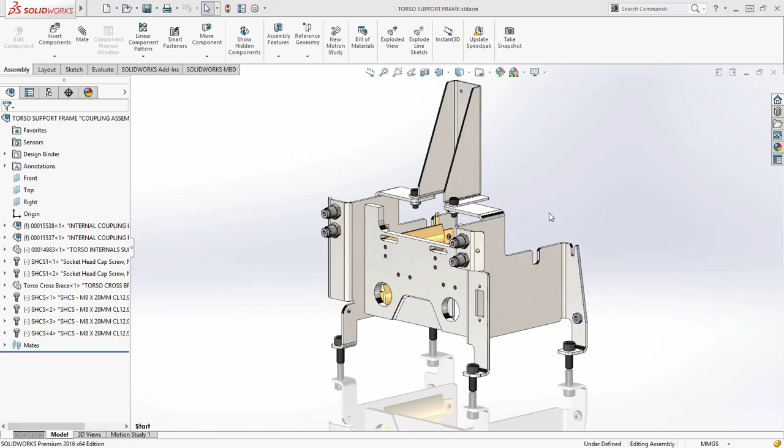SOLIDWORKS 2016 introduces some exciting new capabilities for costing. First, let's take a look at some new sheet metal capabilities. Now this part has already been costed, but we'll show you some new capabilities that have been added, namely the ability to cost a part based on sheet size.

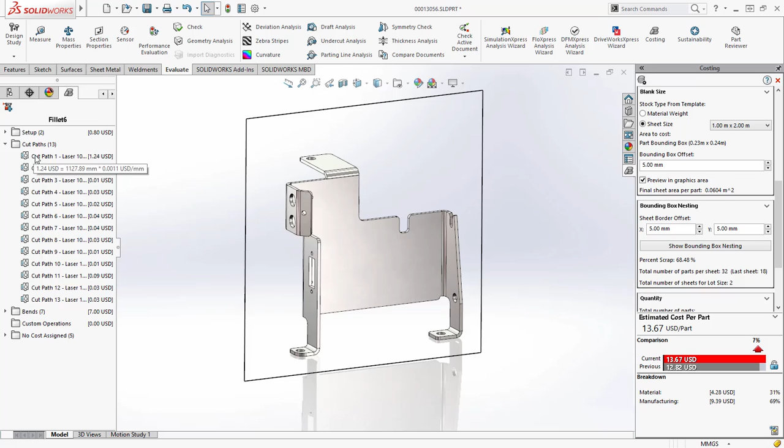Previously we had the ability to cost a part based on material weight. For 2016 you now have the option to choose the sheet size. For this material there are multiple sheet sizes. Notice as the sheet size is changed, the cost per part changes. The bounding box offset is not new, but does give a visual representation of the added material that may be required at the border of the flat pattern outline.

With the new sheet size costing, there is a sheet border offset to add additional material near the edge of the sheet. SOLIDWORKS 2016 introduces basic nesting capability that nests the bounding boxes, giving a quick cost estimate. To be sure, this is not full nesting, which uses algorithms to determine the best way to lay out the parts to minimize raw material use, but does address the request from SOLIDWORKS customers who have indicated that basic bounding box nesting is good enough for the estimation stage.

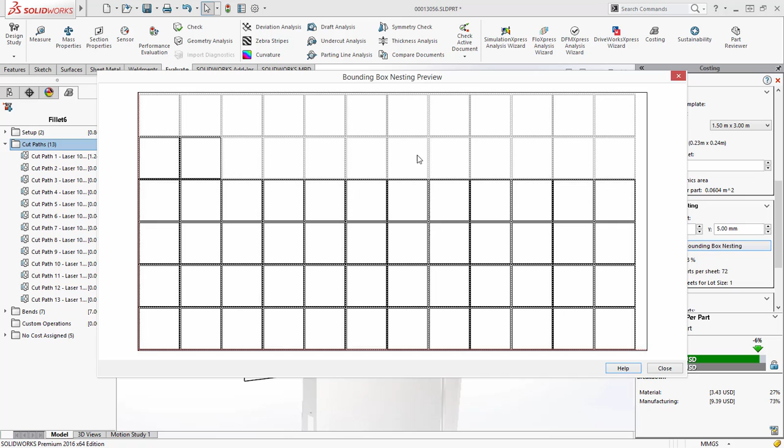SOLIDWORKS provides the percent scrap, number of parts per sheet, and total number of sheets required, in this case 2. Changing to the larger sheet size, you can see that this lot can now be nested in a single sheet. You can get a visual representation of the nesting and see how the bounding boxes line up, and you can see the areas where material is left over, where you can reuse for additional parts.

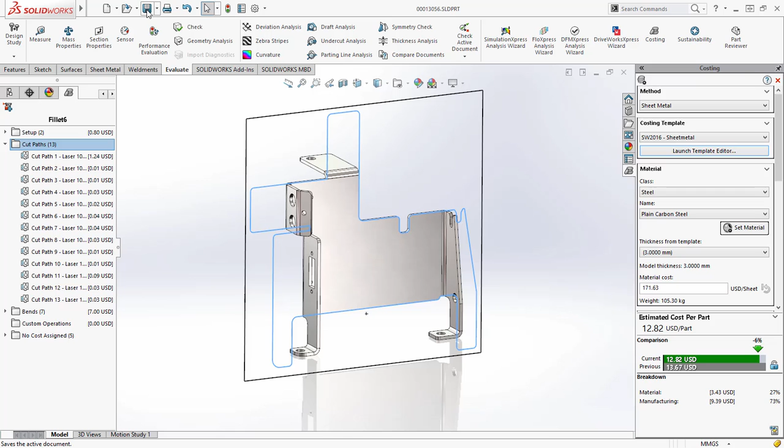The setup is done through the costing templates. Looking at the thickness and filtering for materials, you can see that for the 3mm sheet we have information for costing by weight, as well as 2 entries for the multiple sheet sizes and their associated costs. Let's save this cost information with the part and go back to the assembly and take a look at some enhancements for costing machined parts.

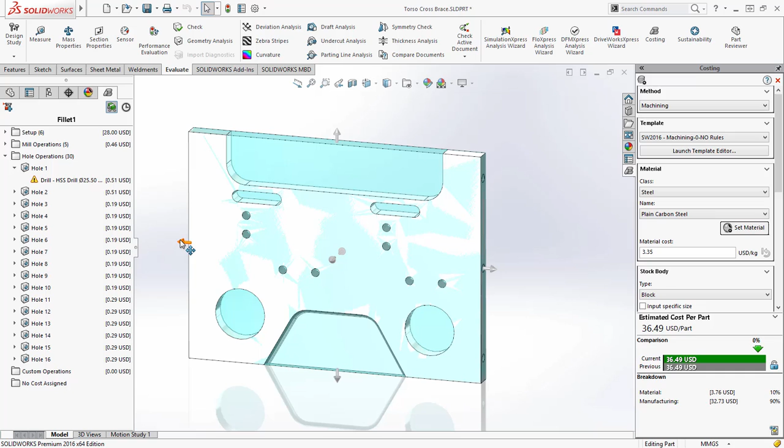In this part we have some large 26mm holes. SOLIDWORKS Costing recognizes these as holes, but since we don't have a drill of that size, warns me of the mismatch with any available tool. To rectify this, you can choose to change this feature to be a milled hole, but it's up to you to remember to do this. On milled parts like this, you may choose to always add some machining allowance around the perimeter of the part. Again, you have to remember to account for this step in the costing process.

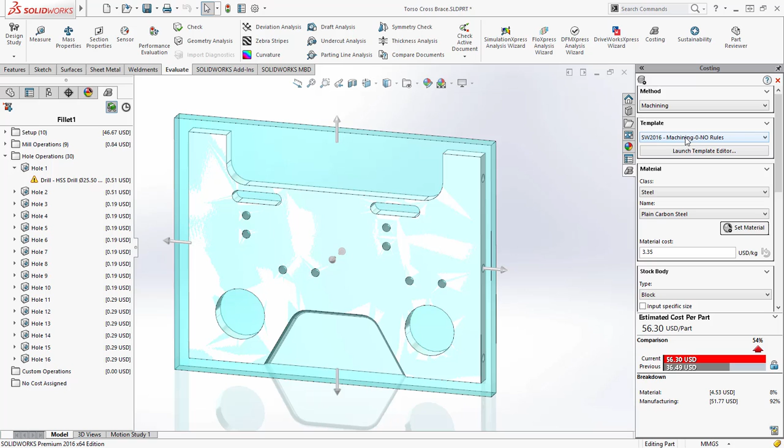Another common action may be to add a custom operation, like anodizing or plating for all steel parts. These tasks are something that the user has to remember to do for each part, but are better done through automation, and SOLIDWORKS 2016 adds just this capability with rules-based costing. Changing to a costing template that contains rules gives you a different cost per part.

Notice that the machining allowance has automatically been added to the perimeter of the part, and there are facing operations to remove that material. The large holes have now been identified as milling operations as opposed to drill, and the zinc plating has automatically been added as a custom operation. All this with no interaction by the user. These rules are captured in the costing templates.

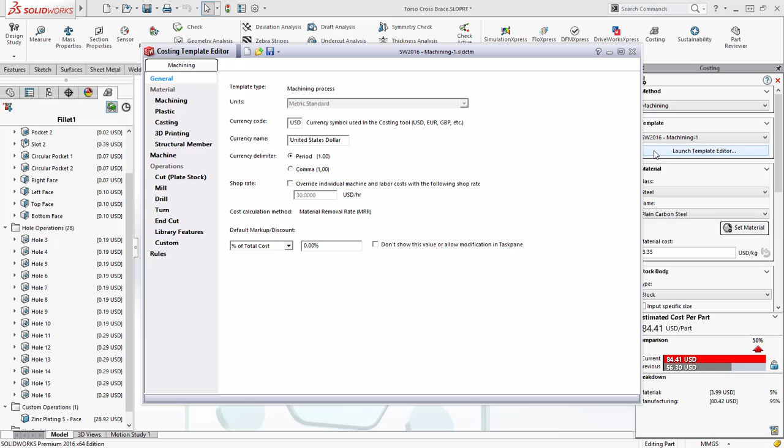The first rule in this template says to convert all holes that are larger than 20mm to milled circular pockets. The second rule says that if the part is steel, then to add zinc plating to the part. And the third rule adds material to the sides of the block if machining is selected. Adding a new rule is simple. Give it a name, then choose the type of rule that you want to apply, if or if then, choose from the available list of rules.

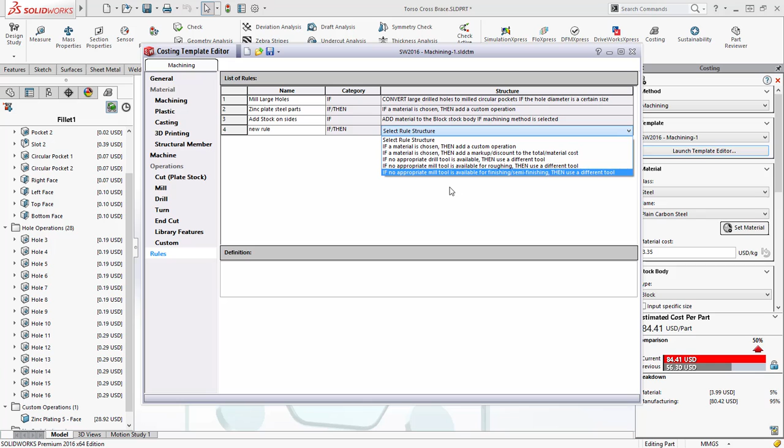This new rules-based costing is a simple way to build intelligence into your templates to keep you from having to remember to do it manually and provide you more accurate cost information. Again, we'll save this part and jump back to the assembly. SOLIDWORKS 2016 introduces the ability to do costing on the entire assembly. You can see that there are 2 parts that have yet to be costed.

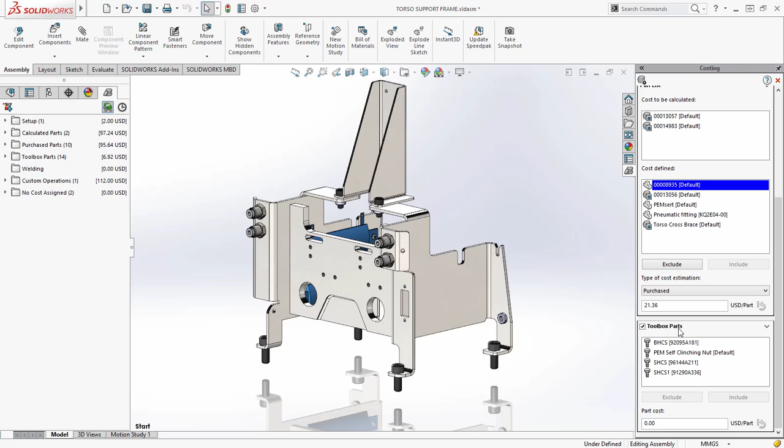Parts that contain cost information are listed as well. The 2 parts that we just worked on are listed with their saved cost, as well as purchase parts with their associated costs. Toolbox parts are included along with their associated costs to give a complete cost breakdown for the assembly. Let's begin the cost estimation for this assembly, and SOLIDWORKS will cost the 2 parts that had no cost information associated with them, as well as do a complete roll-up of the cost for the entire assembly based on the quantities of each part. You can see the newly costed parts along with the ones done earlier.

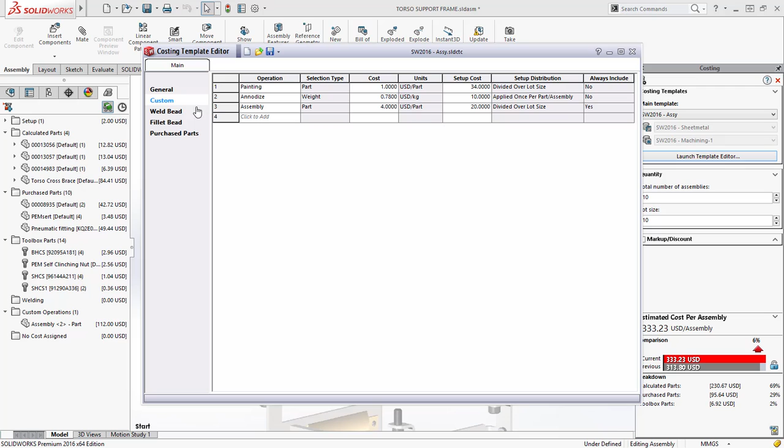Also available are the purchase parts with their quantities on the tooltip, as well as the toolbox parts. There's also a custom operation for the time required to put the assembly together. In this case, $4 per part times 28 parts. Let's take a quick look at the costing template for assemblies, where you can see the assembly operation at $4 per part and information for purchase parts.

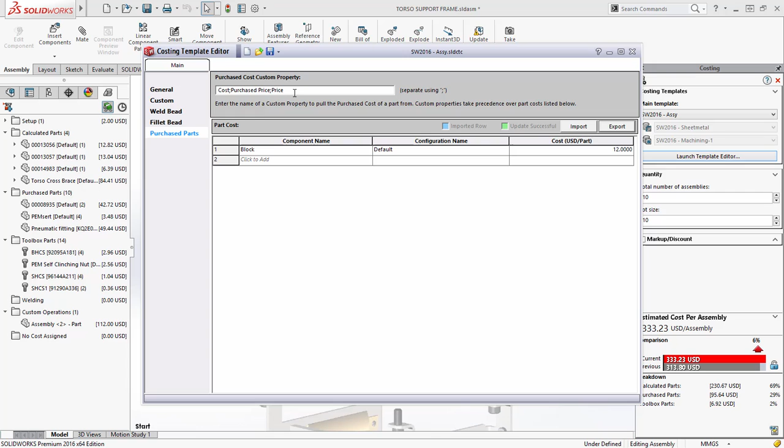Here you can list individual parts and their associated cost, or an easier method is to extract it from the individual part custom properties. In this template, purchase cost will be pulled from any part with a custom property of cost, purchased price, or price. Finally, you need to be able to document this cost information, and this is done by publishing a costing report. Fill out the report information and hit publish. Let's cancel this report and take a look at one that has already been generated for this assembly.

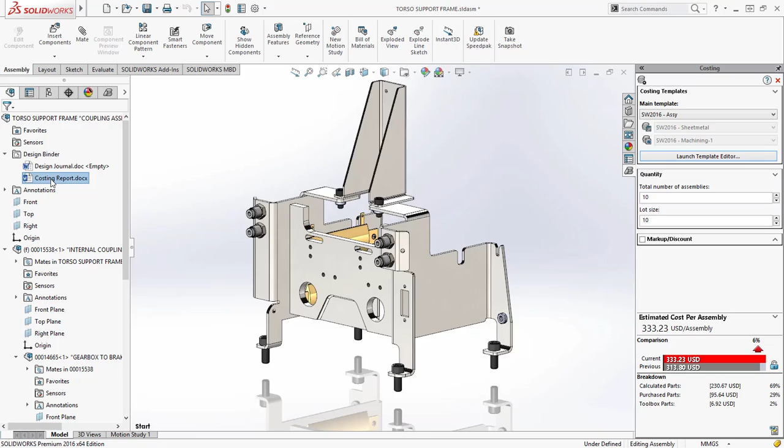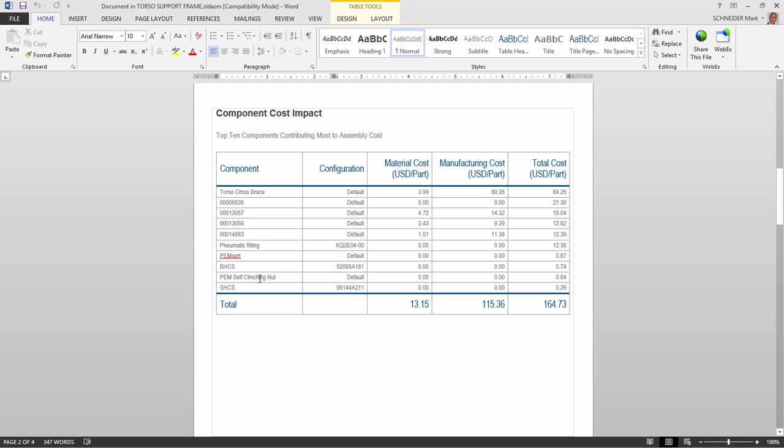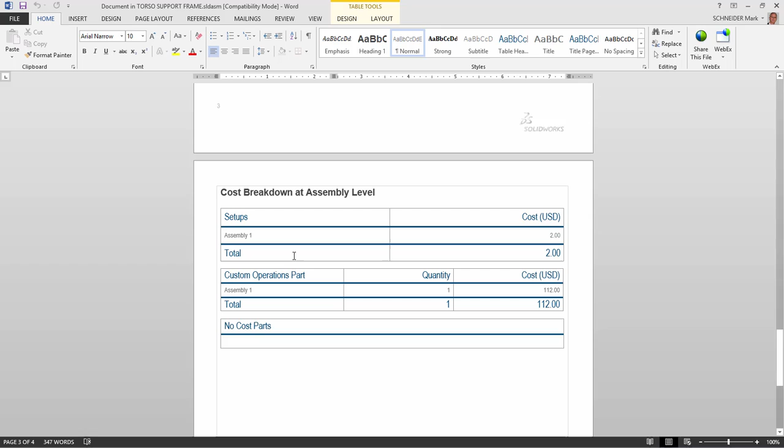Similar to other costing reports, all information is clearly presented, such as information about the assembly, the lot size, total cost, and cost breakdown including any markup. There's also a cost impact area listing the top 10 parts contributing most to the overall cost, as well as individual cost breakdown for calculated parts, purchase parts, and toolbox parts. And lastly, any setups and custom operations. So as you can see, there are a lot of new enhancements to get your parts and assemblies accurately costed in record time.